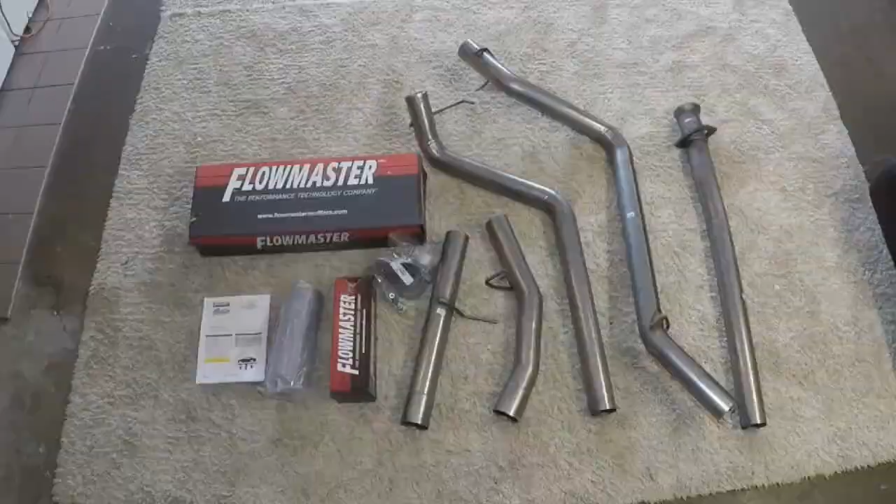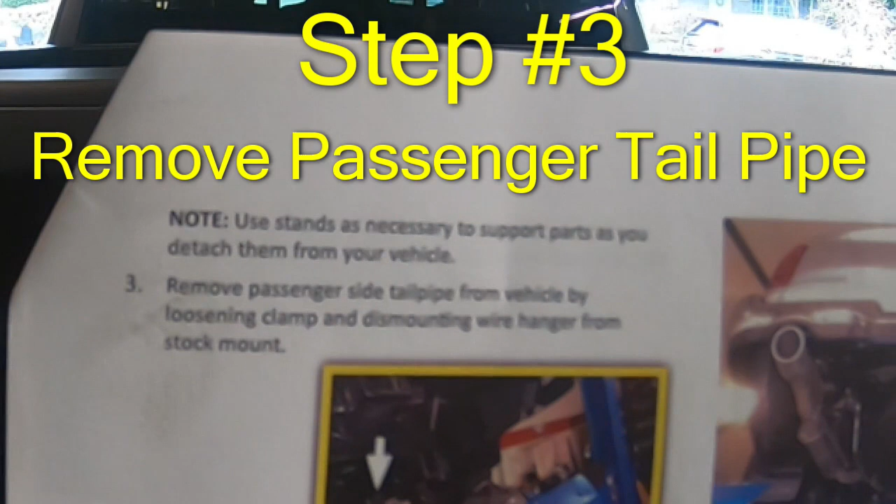It looks like it's getting clear. We've got the vehicle on the jack stands with the wheel chocks. Next step, remove passenger side tailpipe from vehicle by loosening clamp and dismounting wire hanger from stock mount.

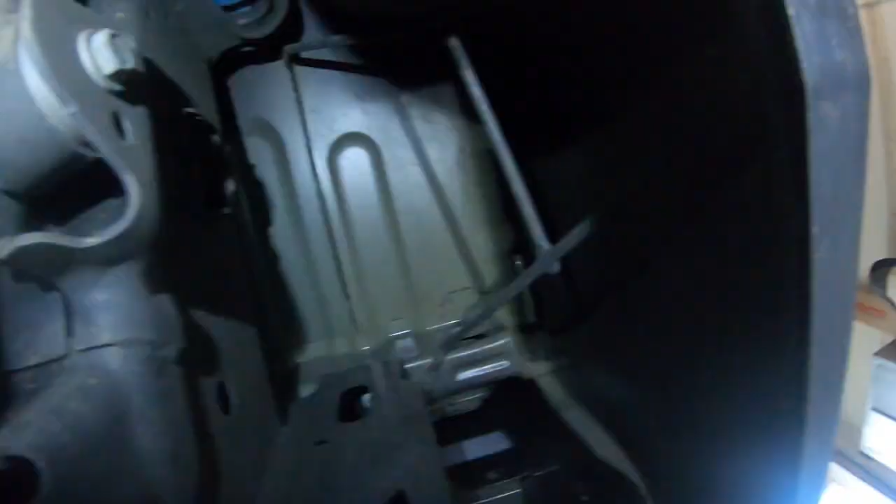Normally you would spray penetrating oil. I like to use PB Blaster on these fasteners before removing them, but this is a brand new truck, so I think it's going to be fine.

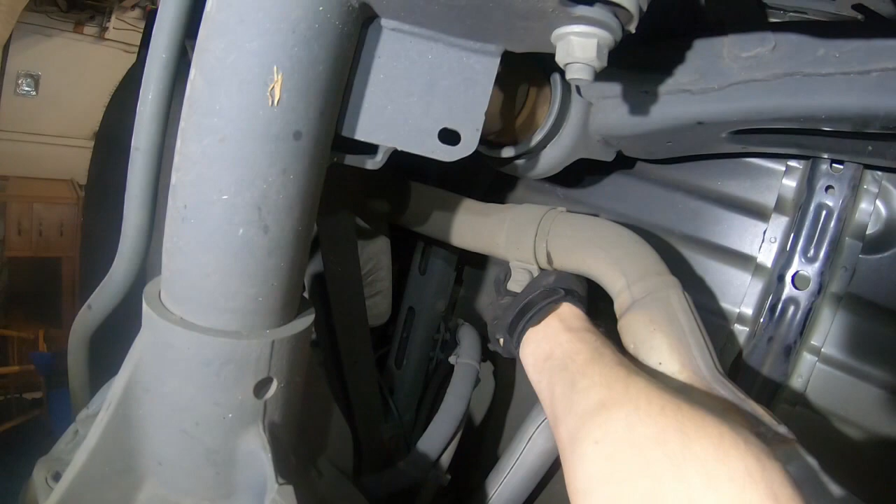15mm. Clamp is good and loose. Alright, now we'll go on to the exhaust hanger next. Alright.

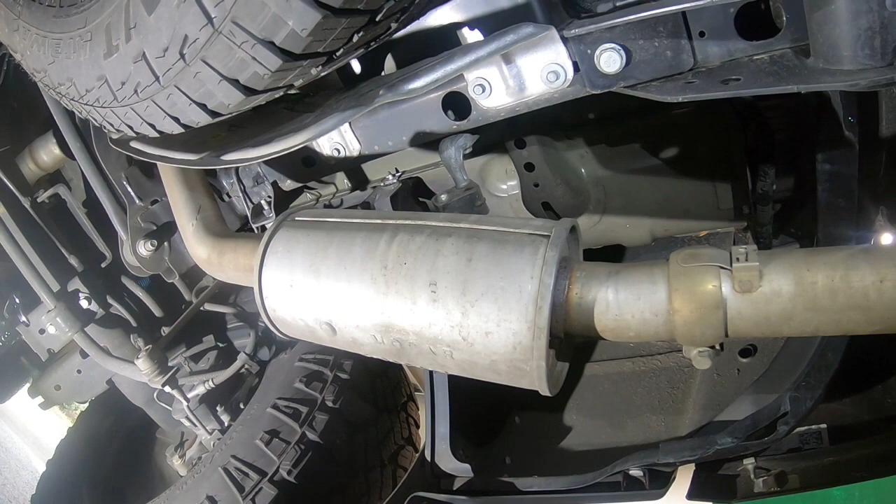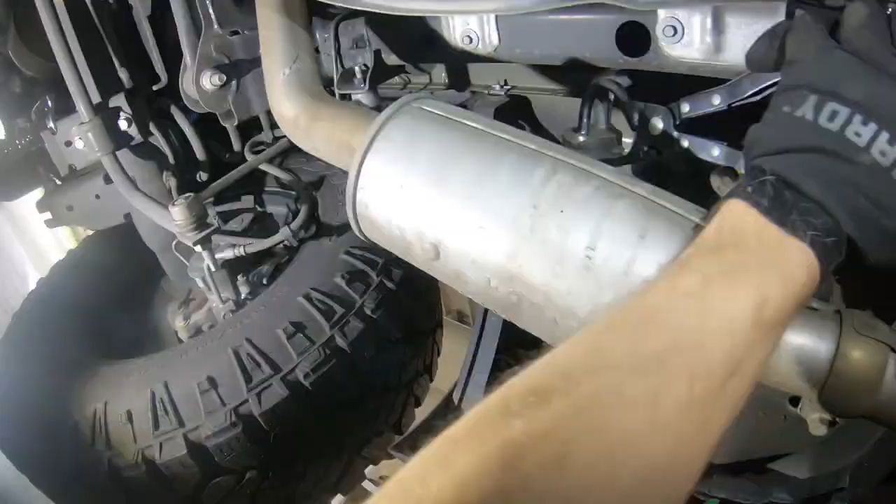Okay, this is the passenger side resonator exhaust hanger. You can do this with a pry bar and pliers, but I prefer to use exhaust hanger pliers. Okay, we got that off.

I don't know if you can see the clamp, that's loosened. I'm going to start by rotating this left and right, or clockwise and counterclockwise to loosen it. So up and down, left and right, and pull.

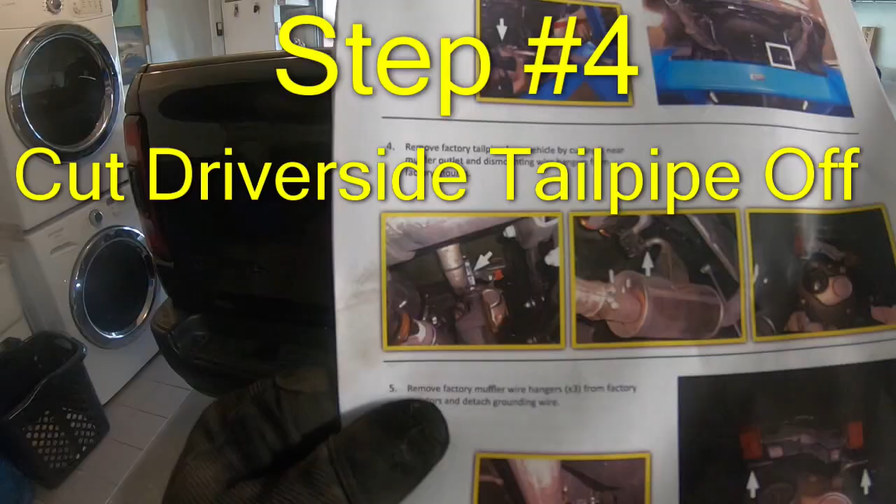This puppy is off. Remove factory tailpipe from vehicle by cutting it near the muffler outlet and dismounting wire hangers from factory mounts.

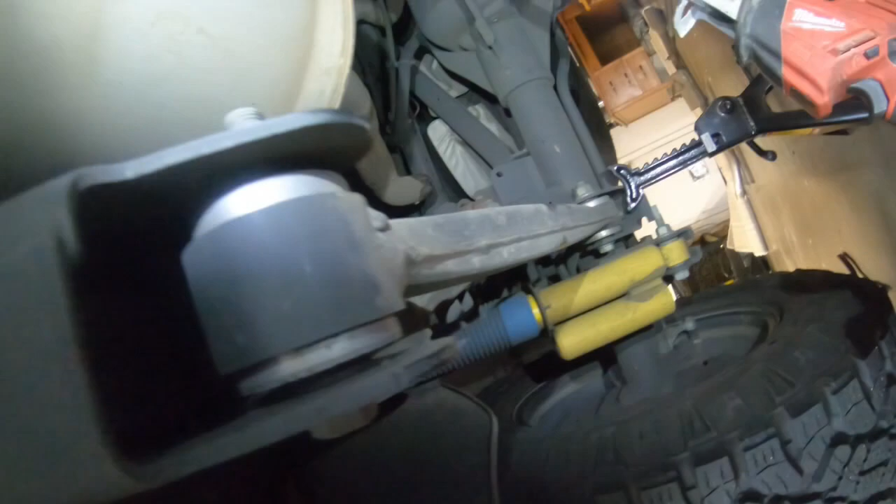Okay, so I have not done the exhaust hanger on the driver's side yet. I am going to cut it first. Grab my trusty Milwaukee.

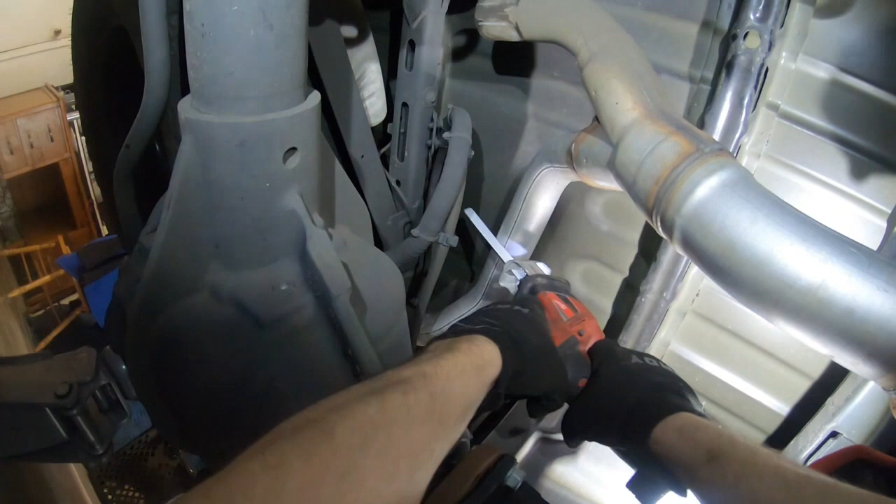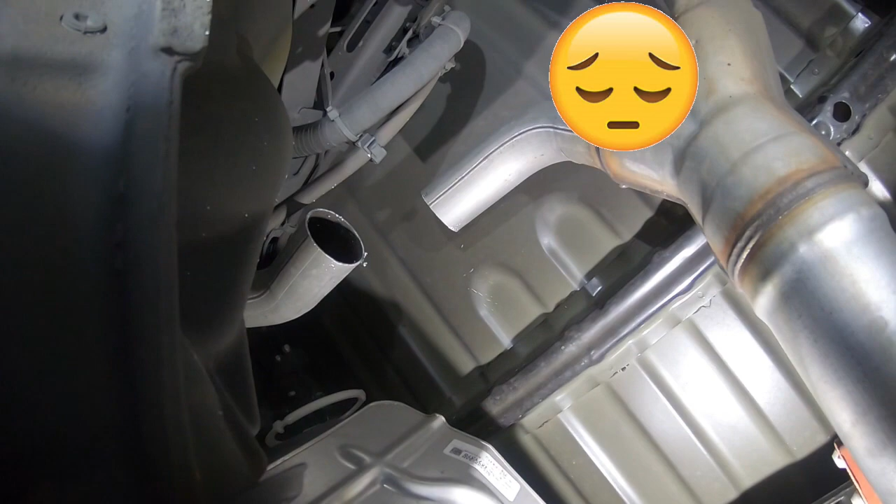Oh, darn it, I scratched the bottom of the truck just a little bit. Okay, look at that. Okay, next step, remove the hanger.

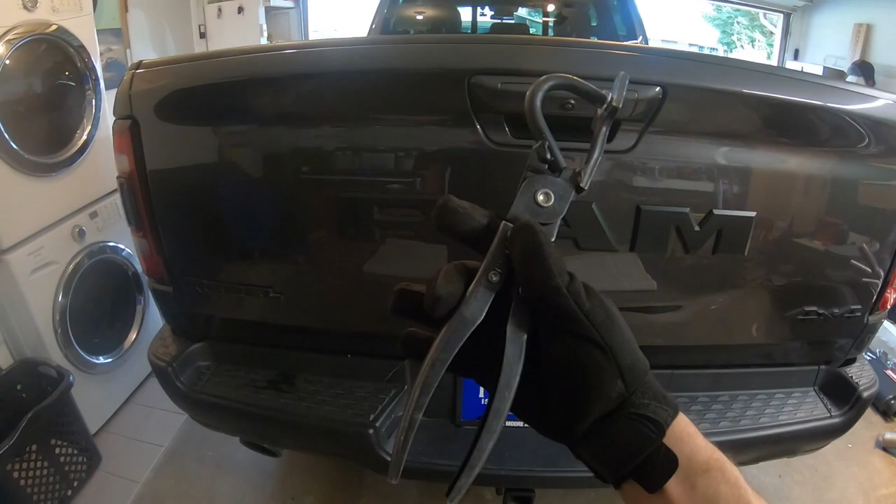Let's give it a wiggle. Okay, that's out.

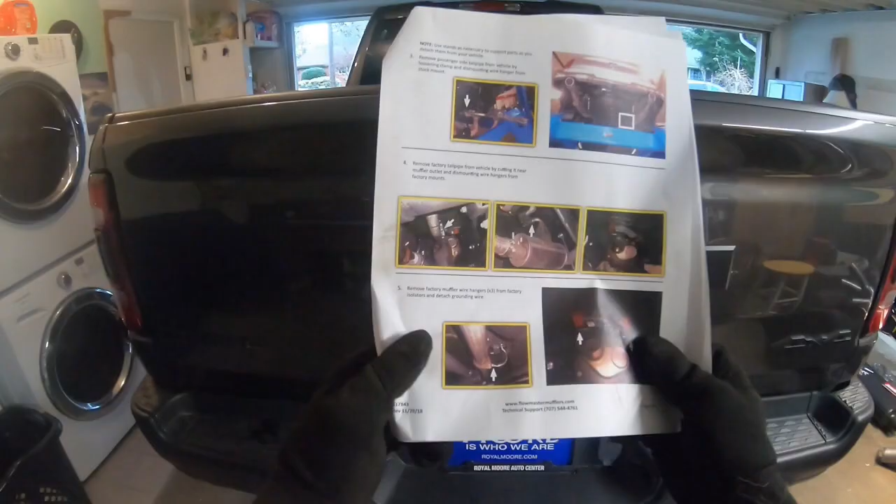Next step, remove factory muffler wire hangers, there's 3 of them, from factory isolators and detach grounding wire.

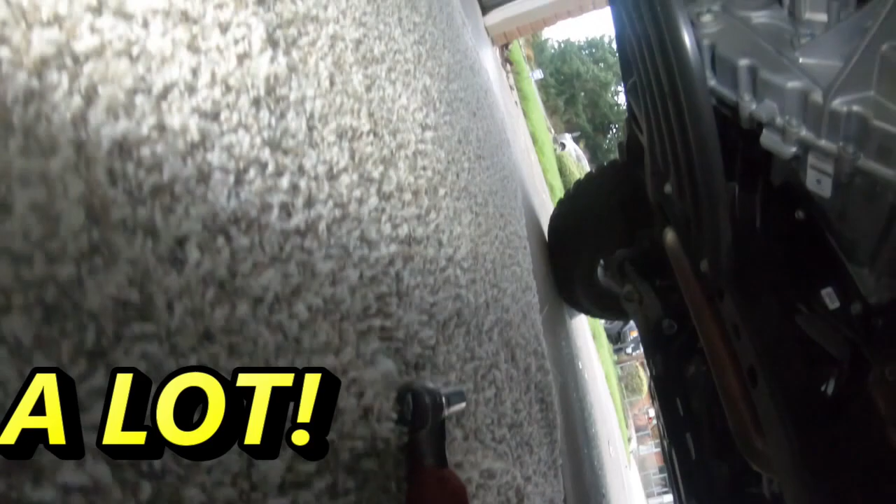Alright, so I recorded this earlier and it didn't quite record correctly. Loosen those a lot, until they're barely hanging on. Then next you're going to unclip your ground wire, it just clips on just like that.

Unclip your ground wire, use your exhaust hanger pliers. Pow, that thing's off. Okay. Next step, you're going to switch over to your 13mm.

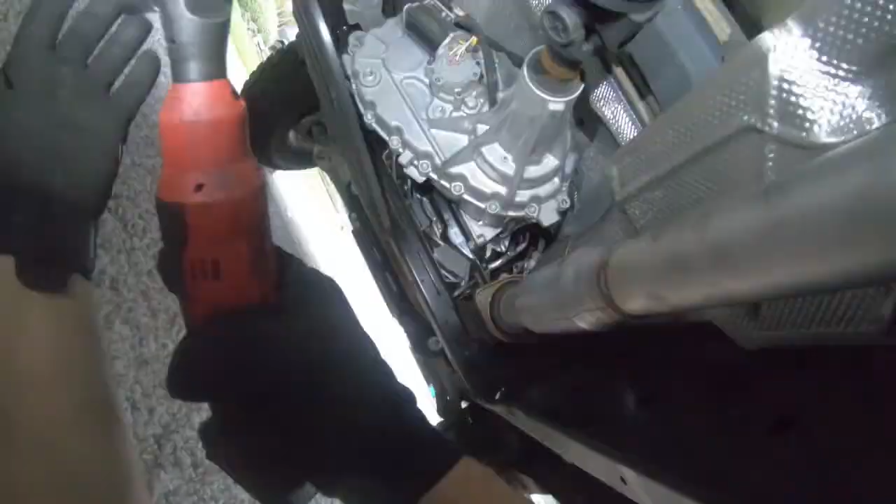Okay, don't need that anymore. This will just slip off. Be careful. Disassemble nuts from factory pipe and catalytic converter flange.

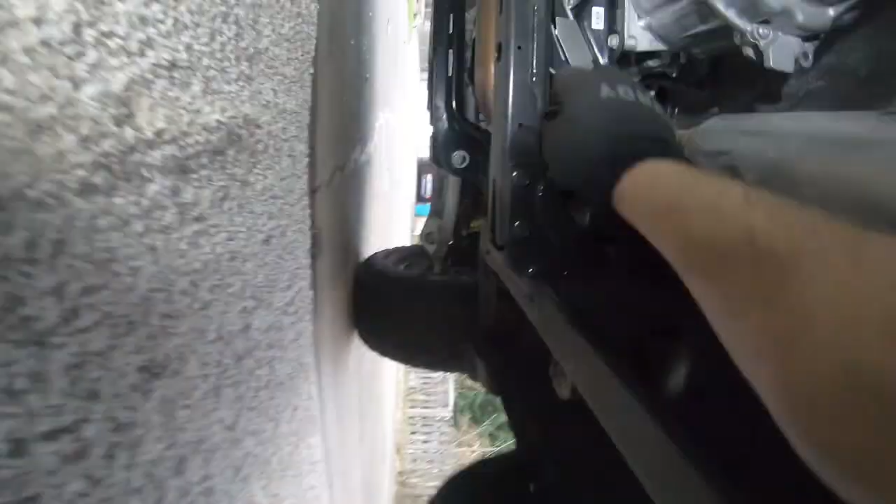Remove muffler. You're going to end up knocking these studs out and using the hardware that came with the American Thunder kit.

Okay, ground wire's loose, exhaust hanger's off. Collector bolts are off, back hanger's off. Grab it here, grab it here.

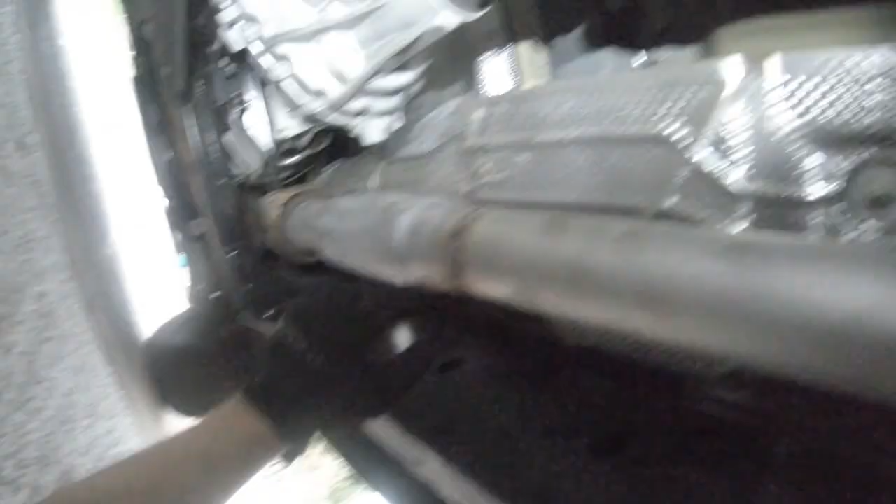Catch any fuel lines back there. Muffler system is off. Let's see what it sounds like without a muffler.

Stock studs from catalytic converter -- they're using an air hammer for this, but I don't have an air compressor here, so I'm going to use a brass hammer.

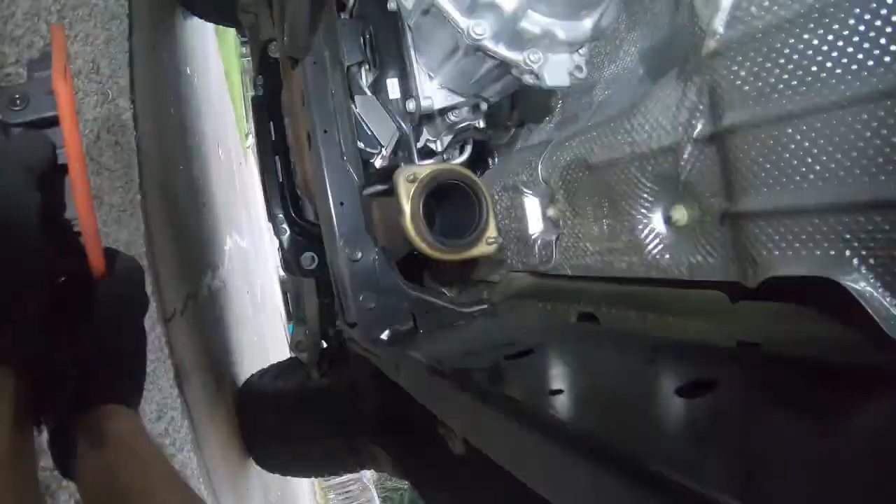Next step, install FlowMaster exhaust system. Remove nuts from stock and nuts from FlowMaster clamps. Apply anti-seize compound to threads and reassemble.

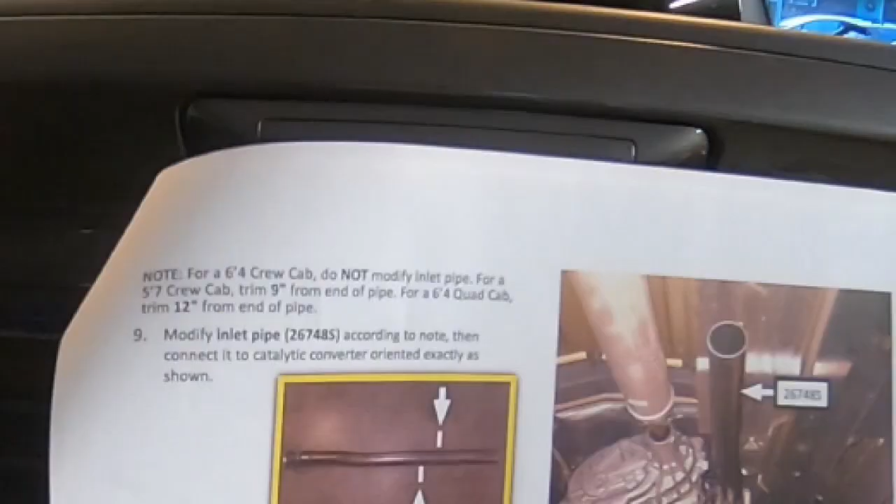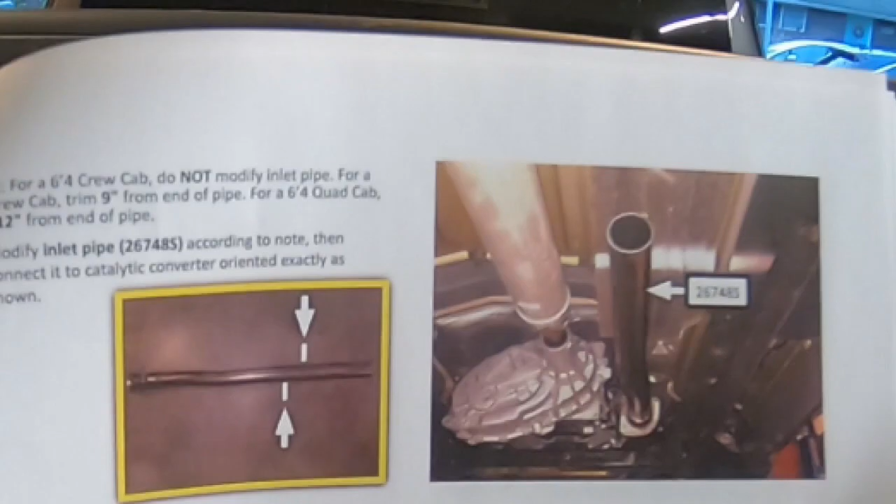For the 6-foot 4-inch crew cab, do not modify the inlet pipe. For a 5-foot 7 crew cab, trim 9 inches from the end of the pipe. For a 6-foot 4 quad cab, remove 12 inches from the end of the pipe.

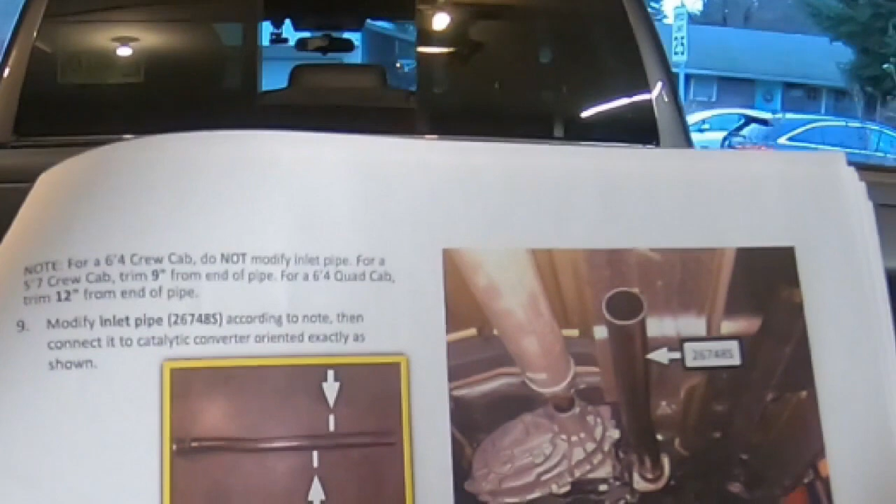This is very important: take a tape measure and measure your bed before you do anything. If you're not sure exactly what to do, you can just lay it out.

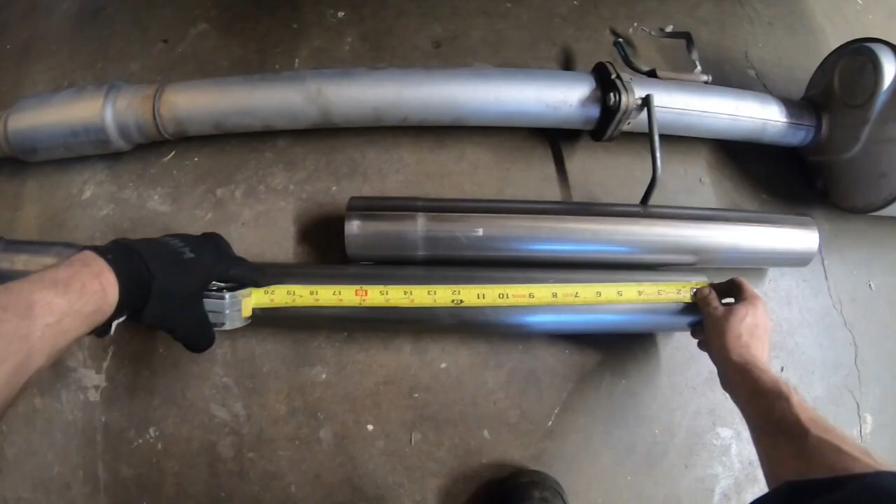And it kind of looks like we're trimming 12 inches off here. Ooh, yeah, 12 inches, that's gonna put us right where we need to be for the 6-foot 4 bed with the quad cab for the 2019 Ram Rebel.

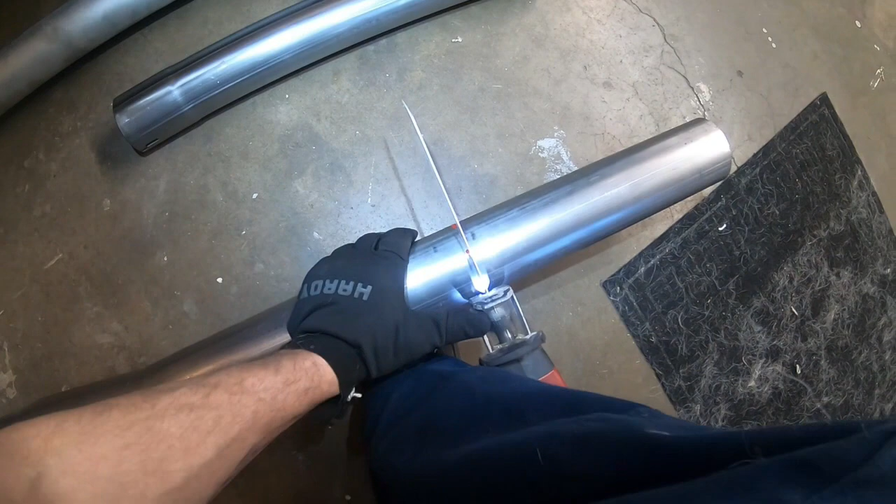Nice, that's pretty square, I think that'll do. It's a slip fit, so it doesn't matter that much.

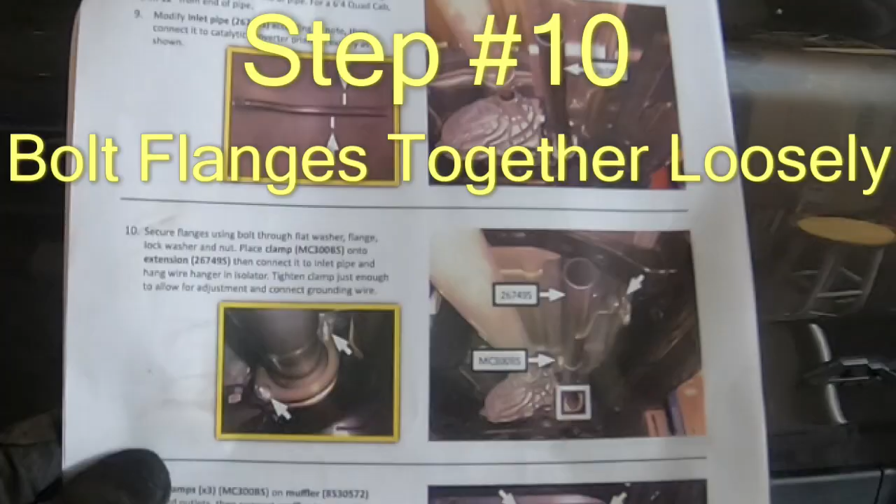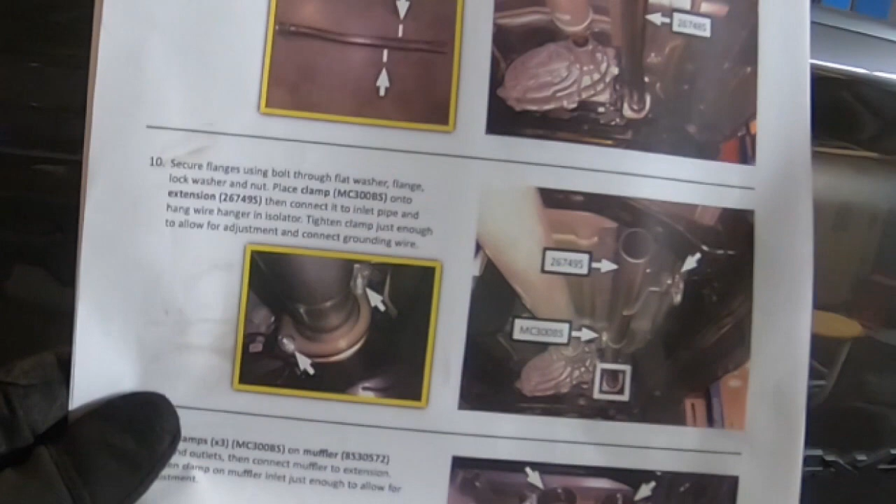Next, we are going to secure flanges using the bolt through flat washer, then the flange, then a lock washer, and a nut. You're going to place the clamp onto the extension, then connect it to the inlet pipe and hang the wire hanger in the isolator.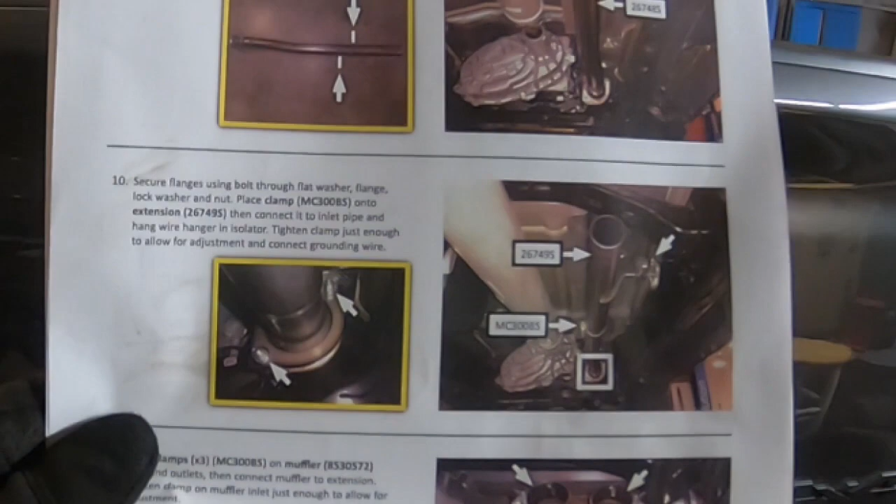Tighten the clamp just enough to allow for adjustment and connect the grounding wire.

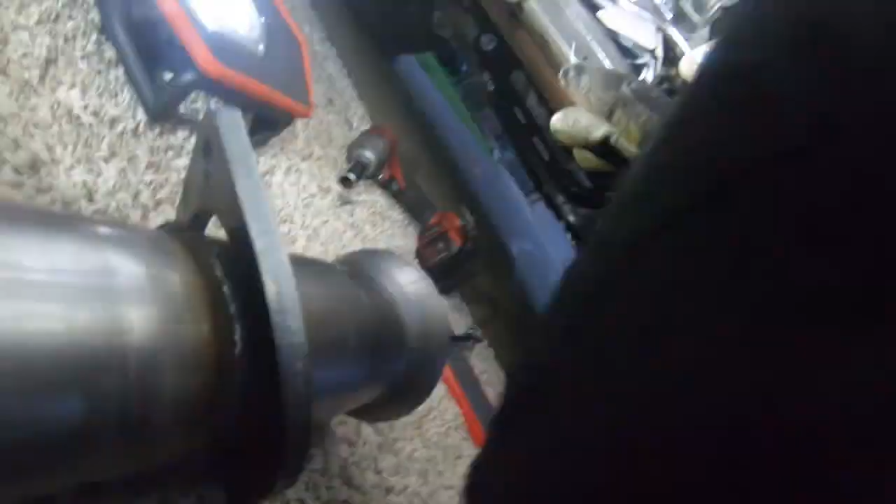We're going to set this up in a manner where you put the hanger through first, kind of hard. Okay, just slide it through, no big deal.

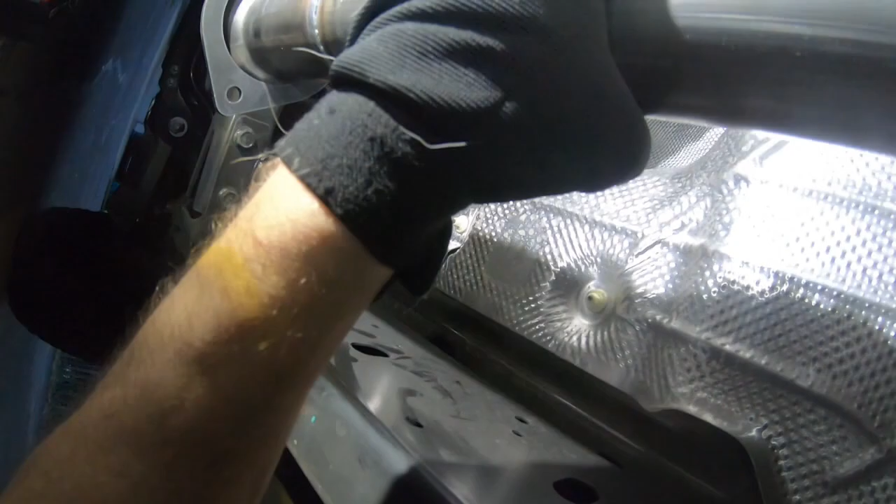Now you're gonna slide the collar back. You're gonna have to force it a little bit. It's okay, just get the bell mouth over it.

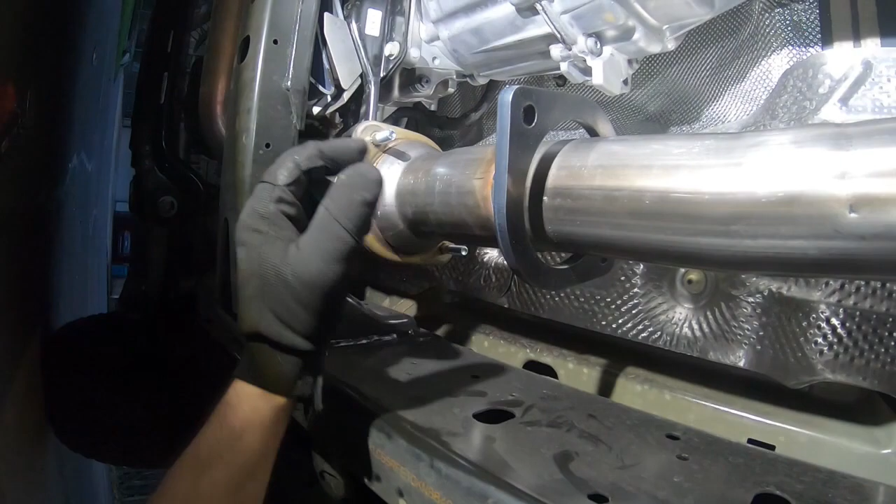Okay, now you're gonna get your hardware on.

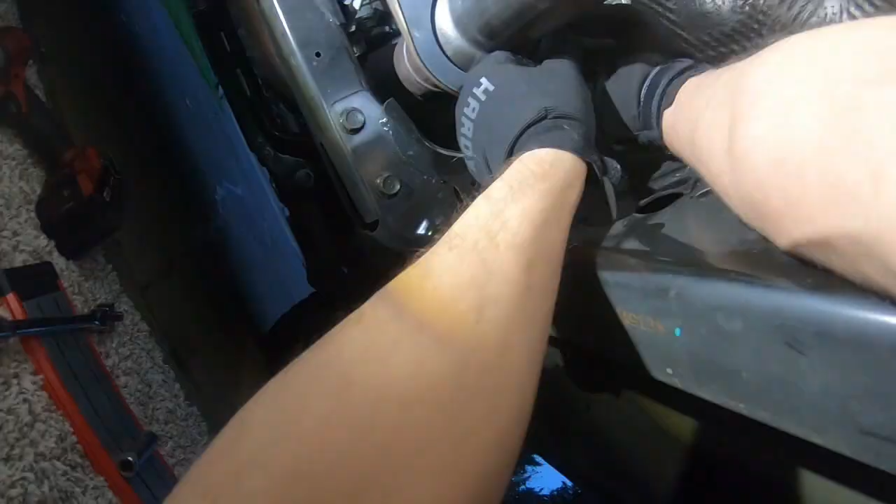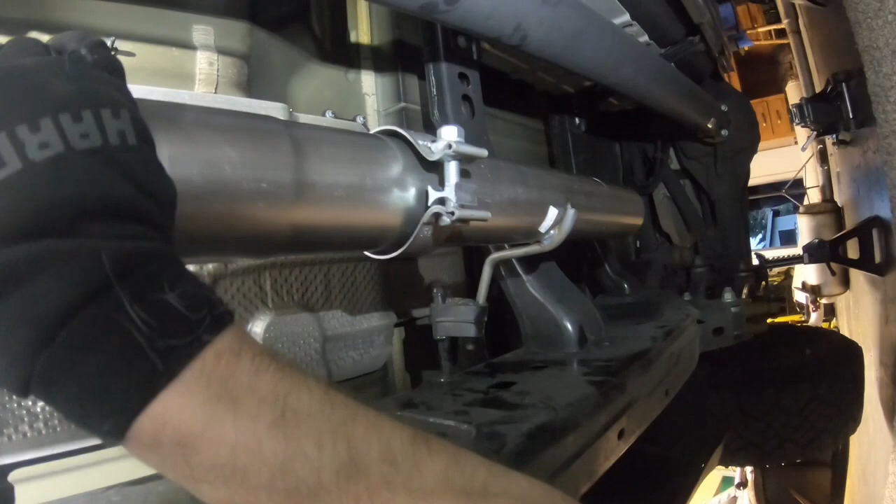Now you're going to get this in there and leave it loose because you'll need to change the orientation as you install more parts, which just holds it in place so you can continue. We're going to add the ground strap from the other exhaust system - I'll show you that in the next clip. Just make sure you get your orientation pretty close. As soon as the bolt's loose, wait until everything is installed before you tighten these.

Next step, place clamps. There are 3 of them on the muffler inlets and outlets. Then connect the muffler to the extension. Tighten the clamp on the muffler inlet just enough to allow for adjustment.

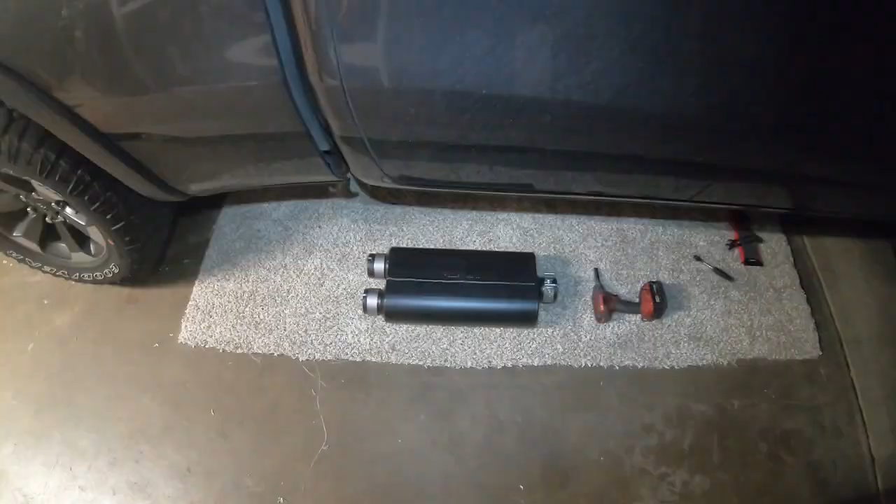Okay, so I put the clamps on. They're nice and loose, 15 millimeter. Get your anti-seize on there so they don't seize up, but I'm going to be welding everything so I'm not really concerned about that. I like to put the seam facing up, not only because it's ugly, but also because condensation that builds up in the exhaust system will kill this weld eventually.

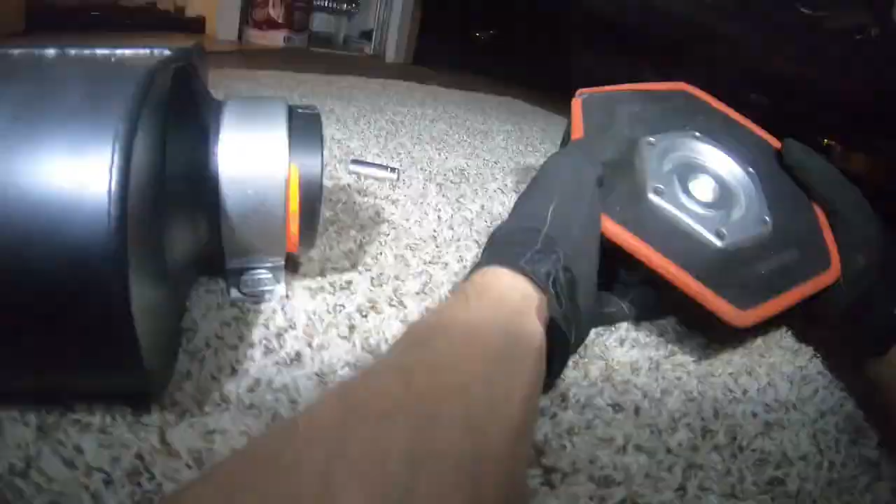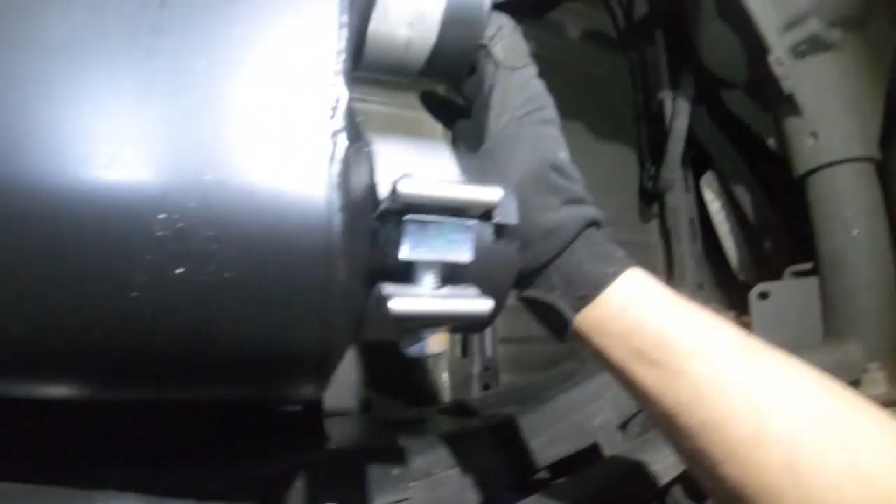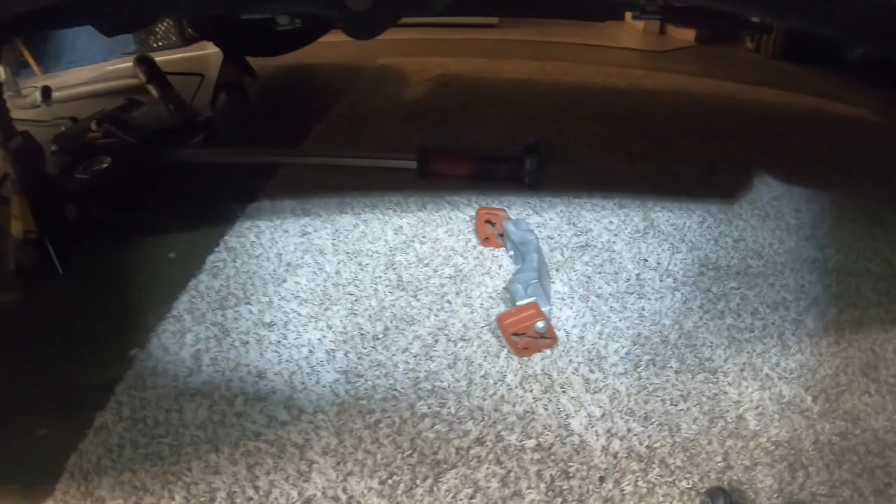It's just going to slip over. Everything's kind of loose. We're going to take the factory hanger off of the old piping, and we are going to bolt it up so that the next 2 pieces, this one first, then this one, have a spot to hang. Now we're going to put the factory hanger mount back in place. They're just 13 millimeter.

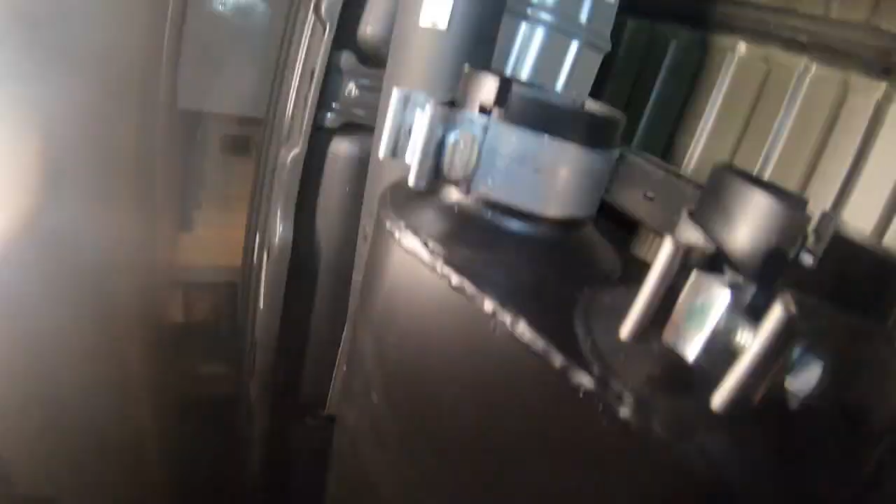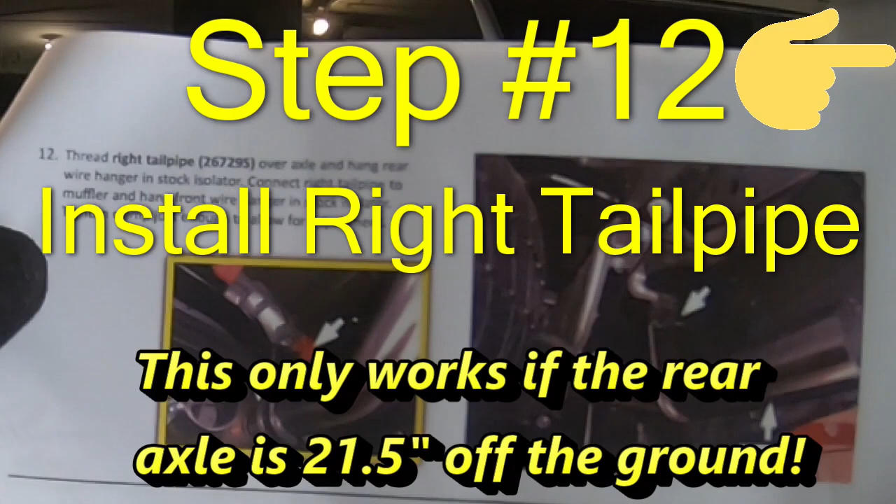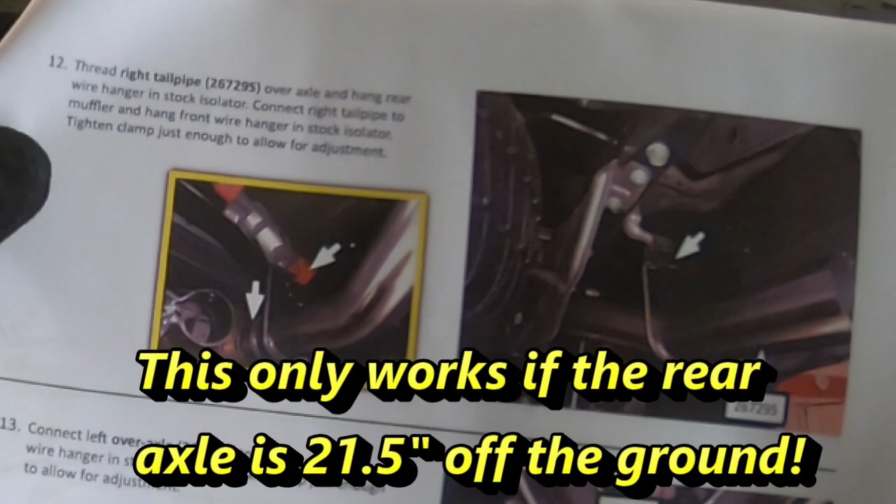Route the right tailpipe over the axle and hang the rear wire hanger in the stock isolator. Connect the right tailpipe to the muffler and hang the front wire hanger in the stock isolator. Then tighten the clamp just enough to allow for adjustment.

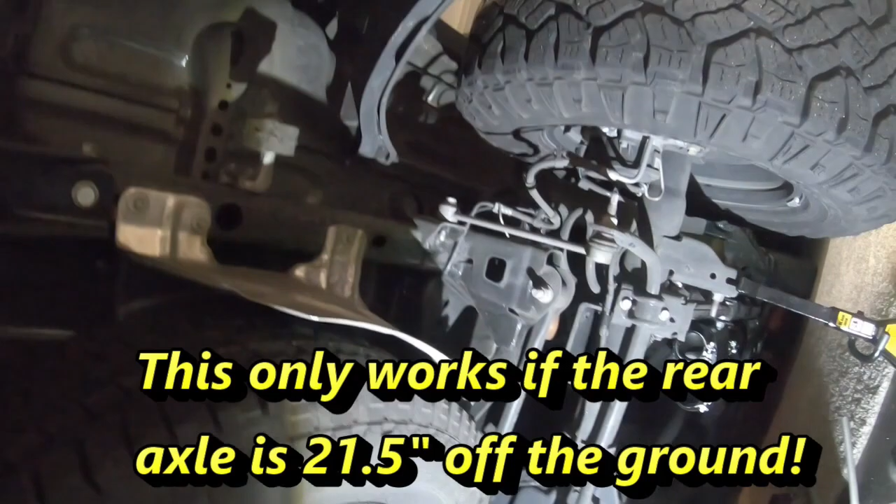Take the right side tailpipe section, and you're going to play a little bit of Tetris here, but it will fit if you get the vehicle 21.5 inches off the ground.

I wonder, could we put it in the hanger first? Yes is the answer. If you're crafty and you can use your feet on the other exhaust hanger, you can install it and slip it into the muffler.

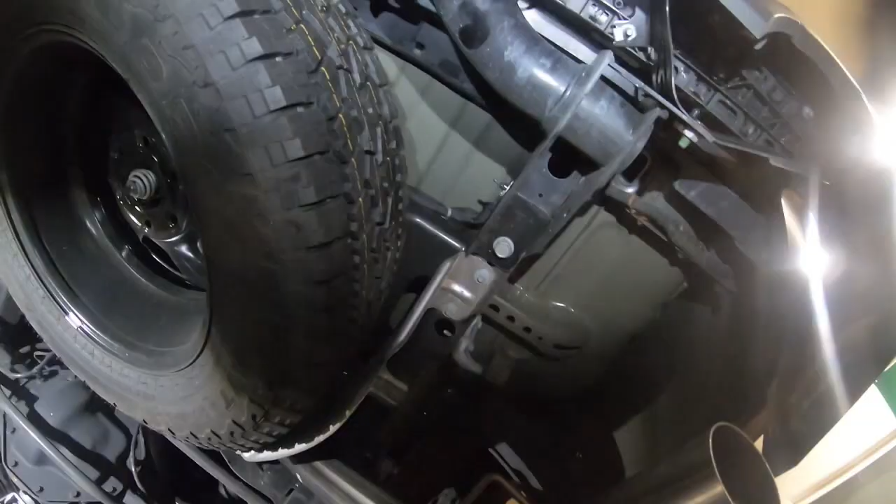Okay, now we're going to put the right side tailpipe section into the hanger.

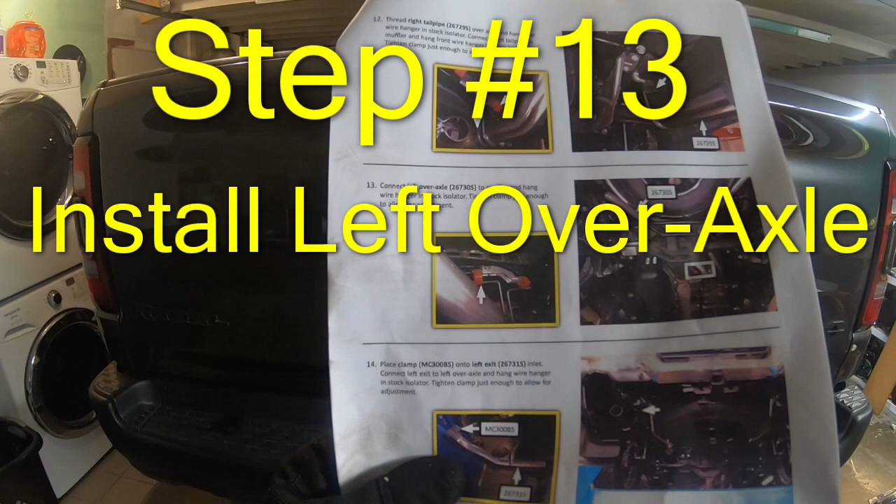Next step, connect left over axle to muffler and hang wire hanger in stock isolator. Tighten clamp just enough to allow for adjustment.

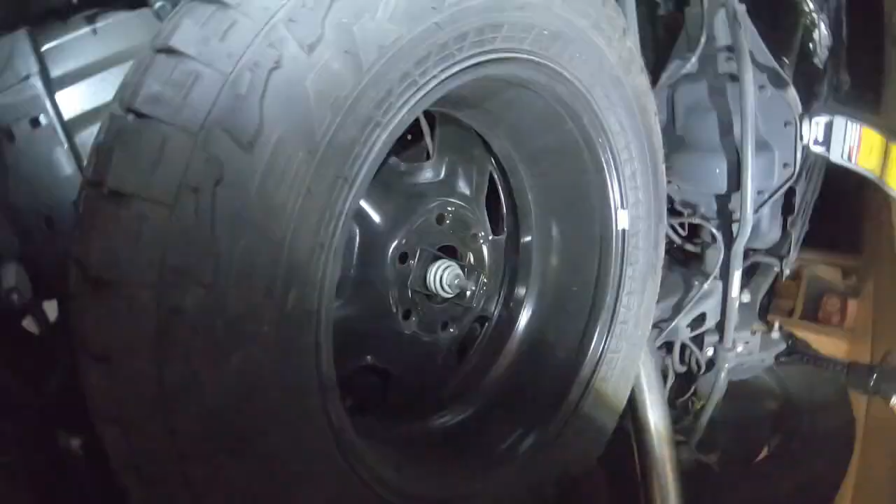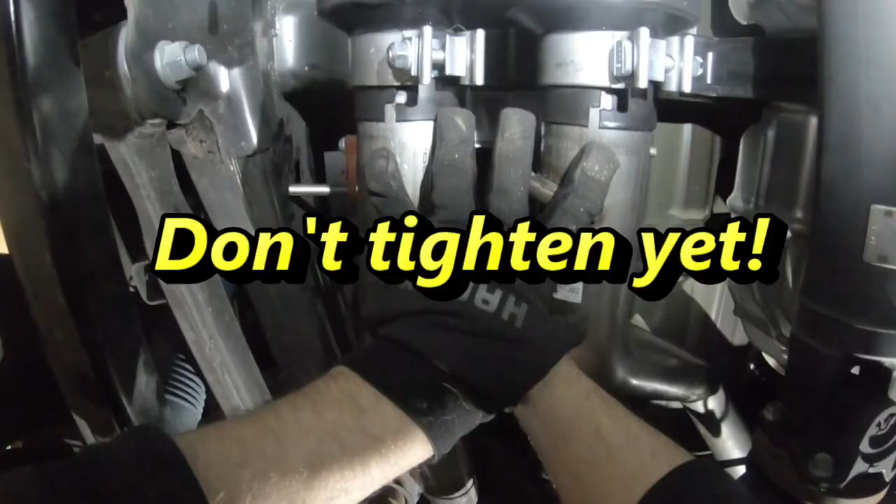You don't want to tighten yet, you need to adjust everything, from the piping down there, to the muffler, to the tailpipes. Don't tighten anything yet. Okay, so that's the last step before you start adjusting and tightening things.

Flip your other clamp over, get your last tailpipe section here. This is the left side, or the driver's side. We're going to try it like we did the muffler - try to put it in the hanger first because it sounds easier.

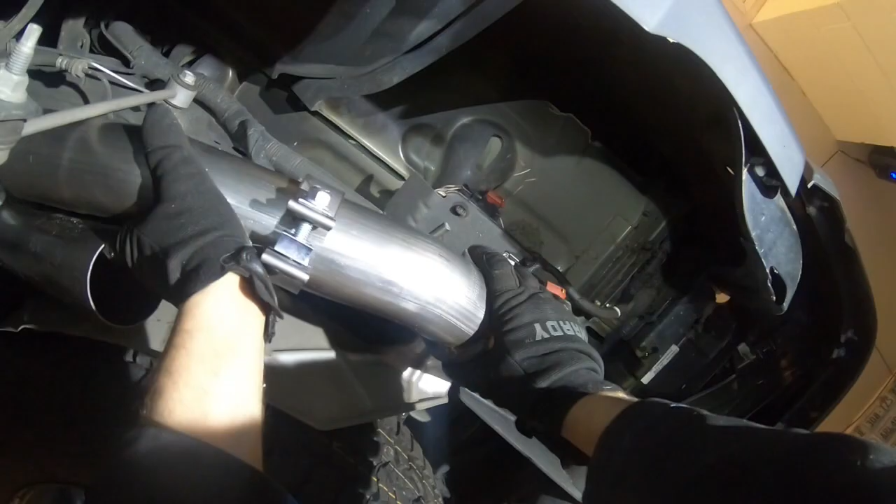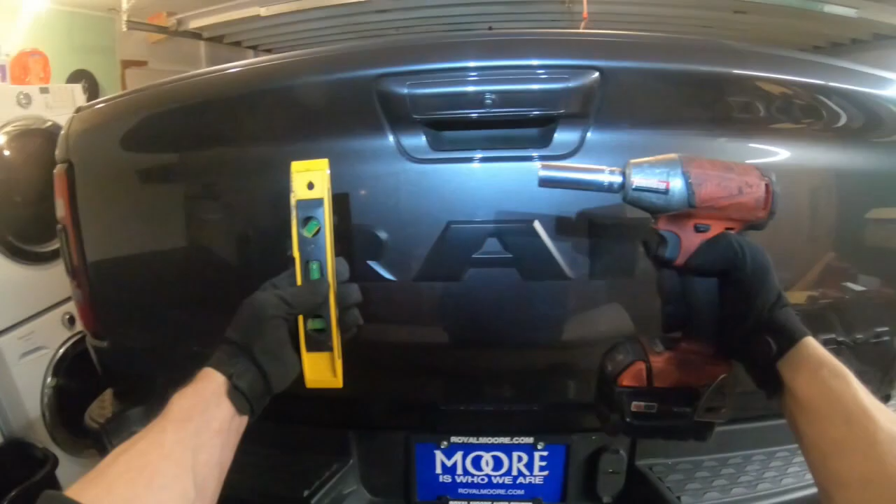Make sure you put your clamp on in a way that you can tighten it. 15 millimeter. Level. Okay, so that's pretty level.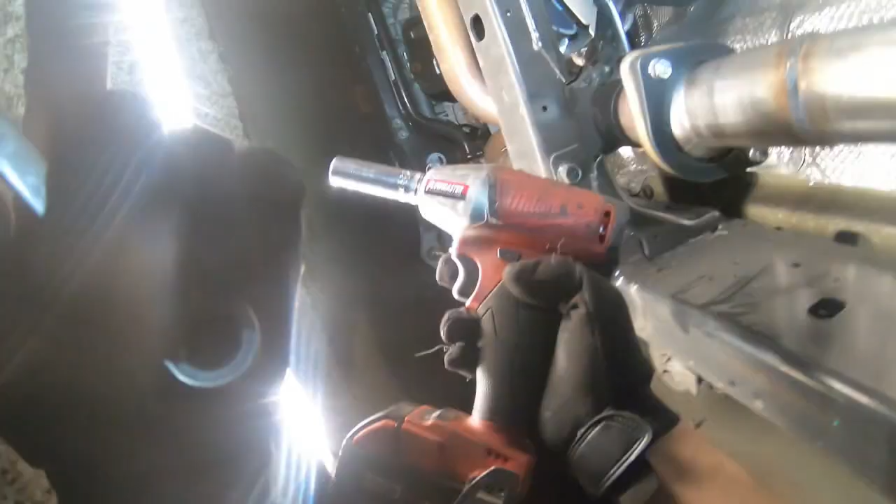We're going to start here at the collector and the catalytic converter. We are going to use a 15 millimeter wrench and 15 millimeter socket. That's kind of where it's going to be.

We got a nice overlap here with our exhaust system. You don't need a wrench for this, just a socket. I position the clamp in a place that's easy to access. 15 millimeter.

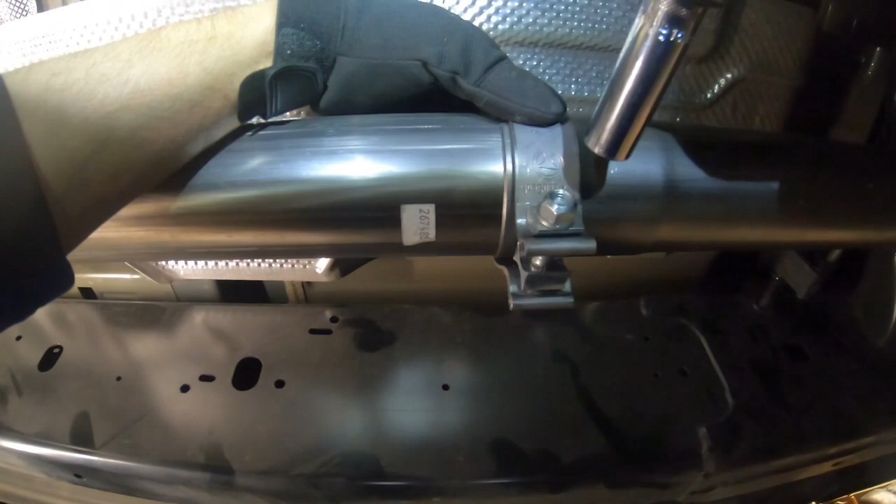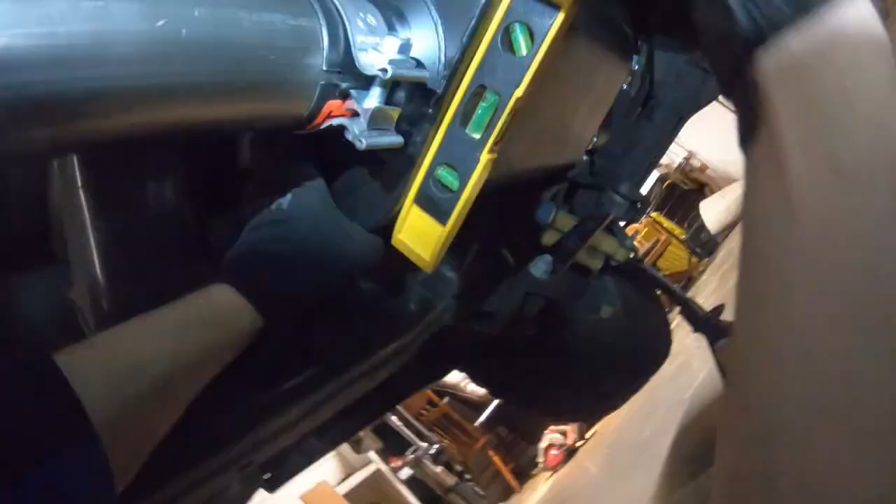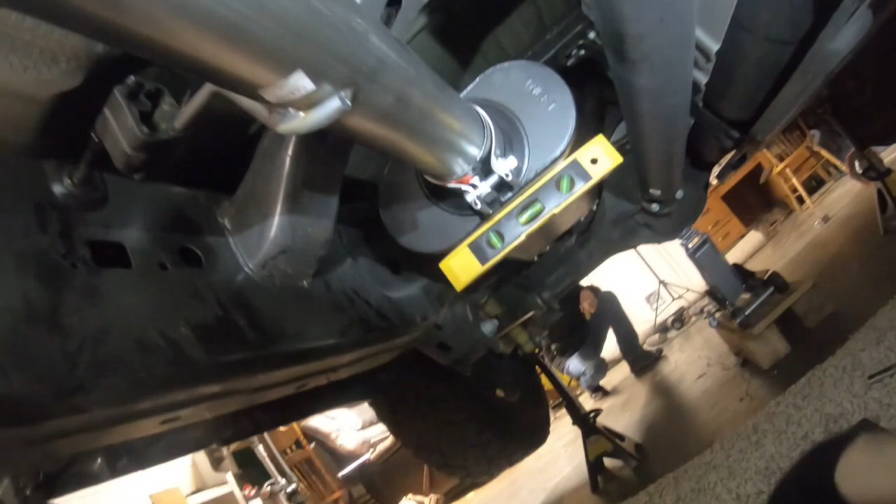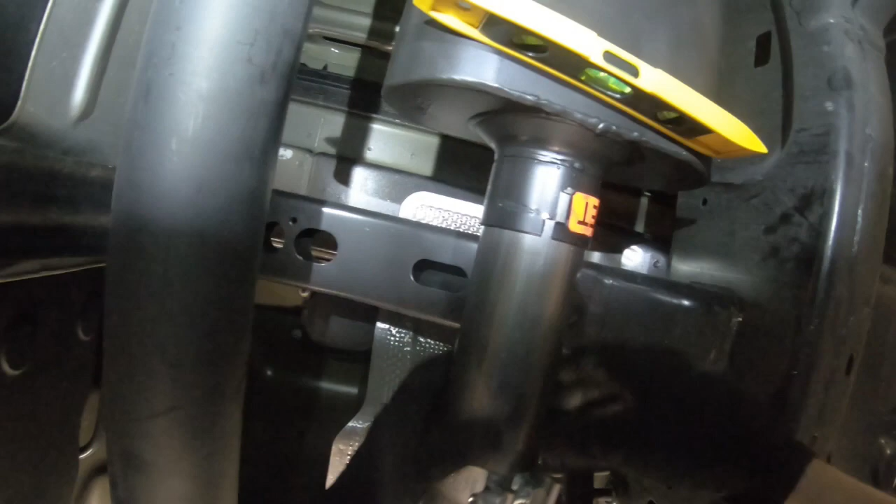I still have to add the ground strap on. Okay, level, level, muffler's level. I can access this clamp with my gun here. Make sure your overlap goes past here or you're going to have an exhaust leak.

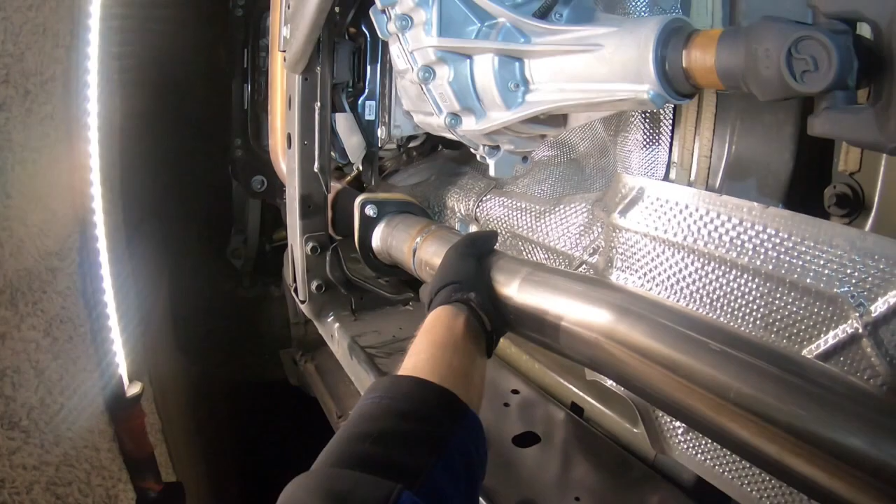Alright, let's see what we're doing here. We're still pretty low. So you got your exhaust clamp on, you got your hanger here. We are going to put the ground on right here. All this is looking good. On to the next step.

We want this to go on just a little bit further. And just shake it. Okay, he's in. Remember the overlap I talked about. They're looking good, they're looking good.

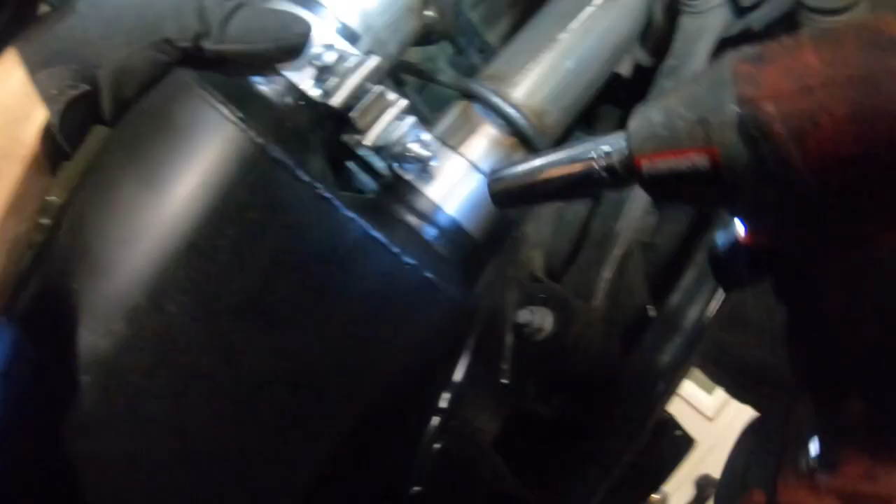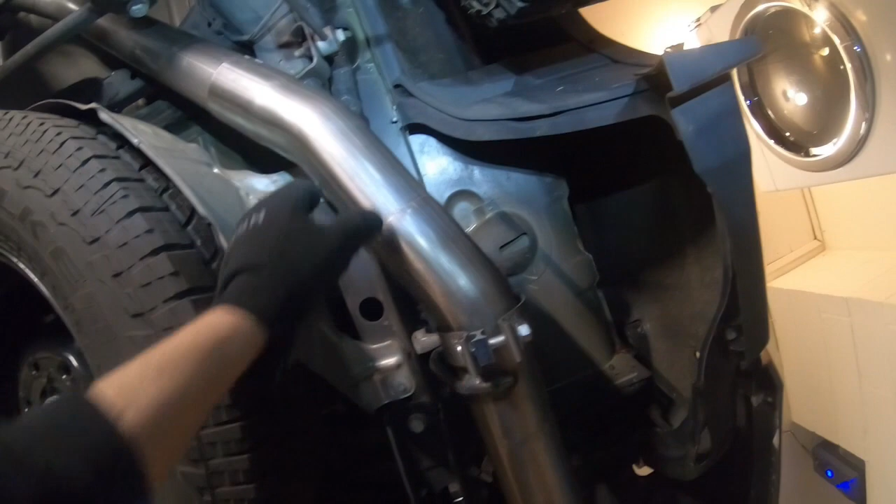We lifted the vehicle by the axle so that when you lower this down to the ground, everything's in its respective position. Unfortunately, the tailpipes need to be expanded in order to slip over this, so we're going to do that tomorrow.

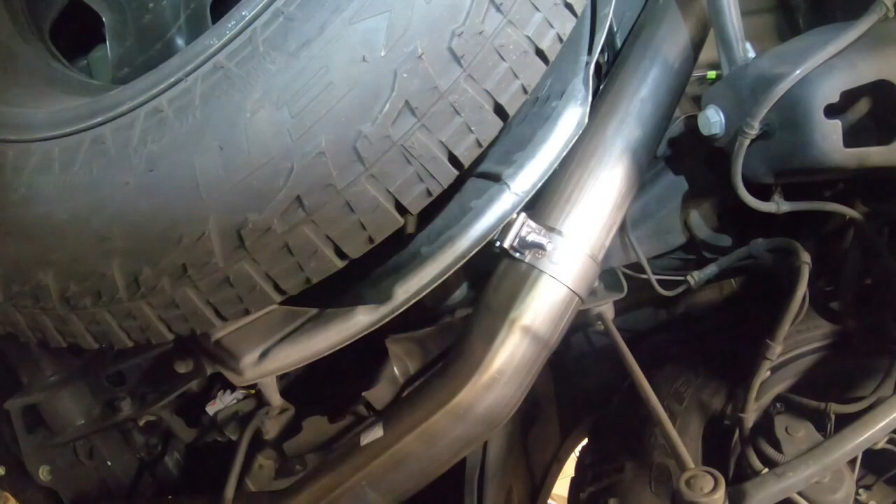Notice there are no rattles. Surprisingly difficult. Disappointment. These do not slip over either. Disappointing.

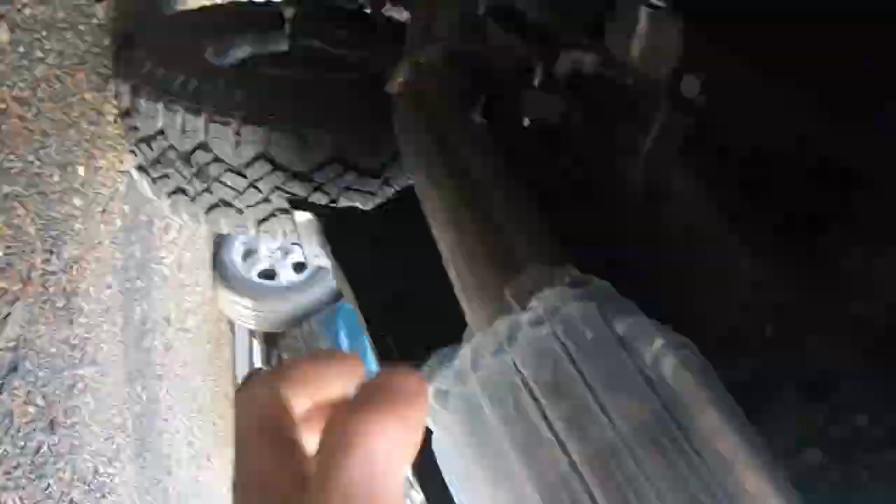Okay, you're going to install these tailpipes with the bubble wrap on them so you don't scratch them or scratch the truck. You're going to need a rubber hammer. You will have to do some moving around to get them to look perfect. After you're happy with how they sit, then you tighten them down.